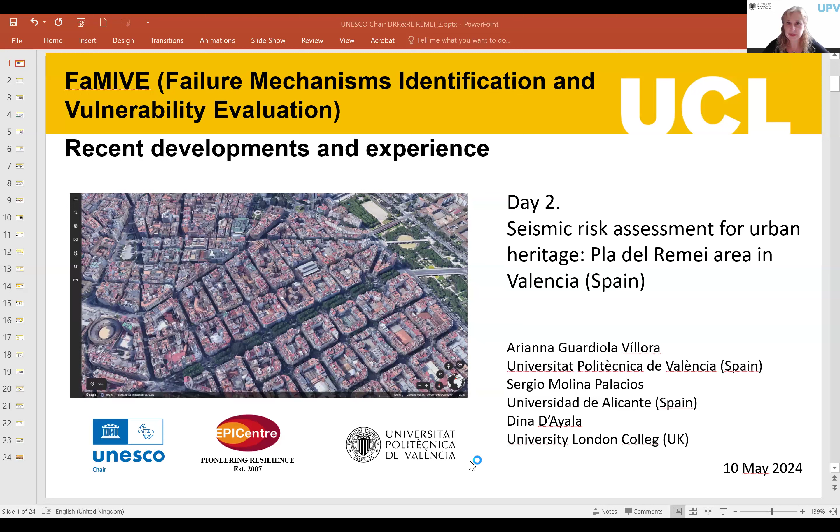Can you see my screen now? No, it doesn't seem to load. Maybe I can share it at this end. Now yes, now it's sharing. So please go ahead. Can you see my screen? Yes. No, it doesn't seem to work. And you are now muted, Ariana. You are muted. We can see your screen now, but you are muted. Now, can you hear me? Yes, and we can see the screen. So perfect. So I'm presenting.

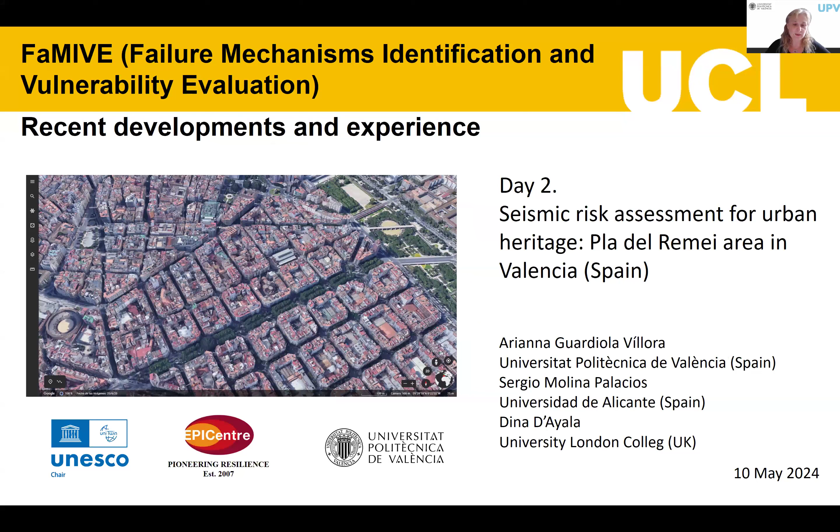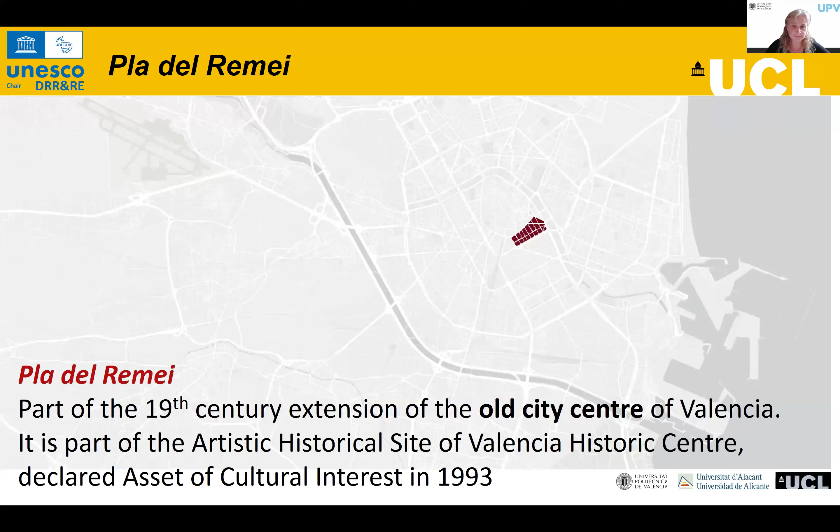My presentation is about the seismic assessment for the urban heritage, the case of the Pla del Remei in Valencia. Pla del Remei is part of the 19th century extension, this part in red, of the old city center of Valencia, which is this part in the map. It is part of the artistic historical site of Valencia Historic Center and was declared an asset of cultural interest in 1993. This area, where most of the Valencian modernism is located, was developed between 1884 and 1950 after the demolition of the medieval walls, and it's formed by 20 blocks.

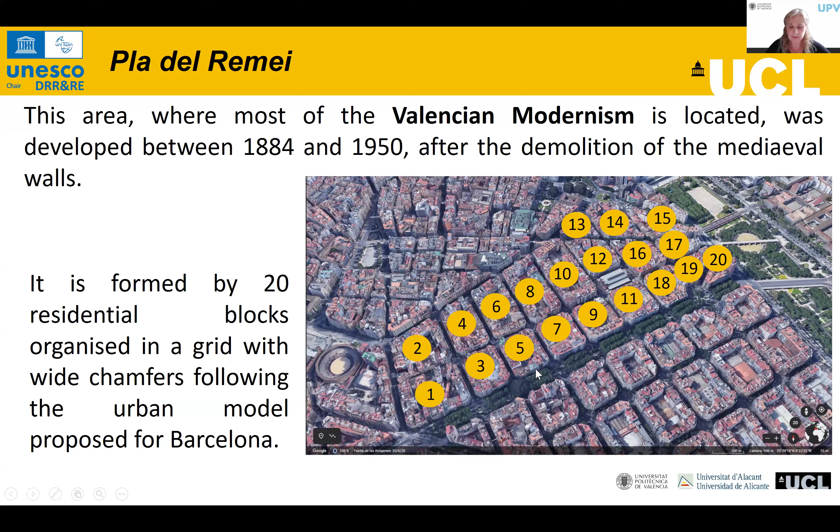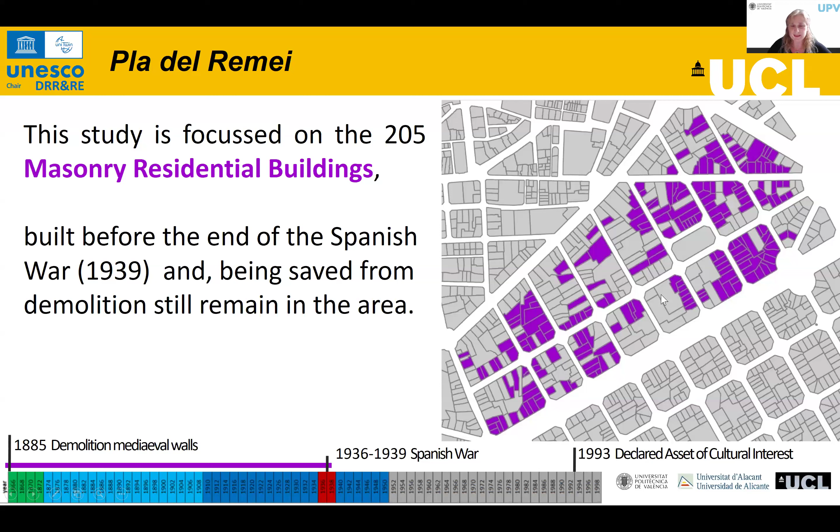Here in the timeline, we can see the date of the demolition of the walls, the date of the approval of the urban plan for this area, 1887, the Spanish War, and the date in which this area was declared an asset of cultural interest. This study is focused on the 205 masonry residential buildings, those in violet in the area, built before the end of the Spanish War in 1939, and, being saved from demolition, still remain in the area. We can see here in the timeline the period in violet that we are going to study, with the date of the demolition of the medieval walls. And this part in gray corresponds to the years in which these buildings in gray were demolished and substituted by new modern buildings.

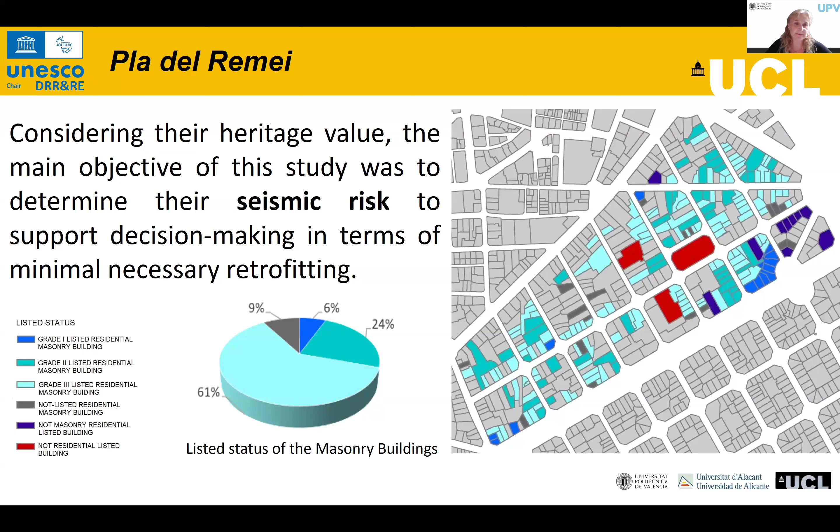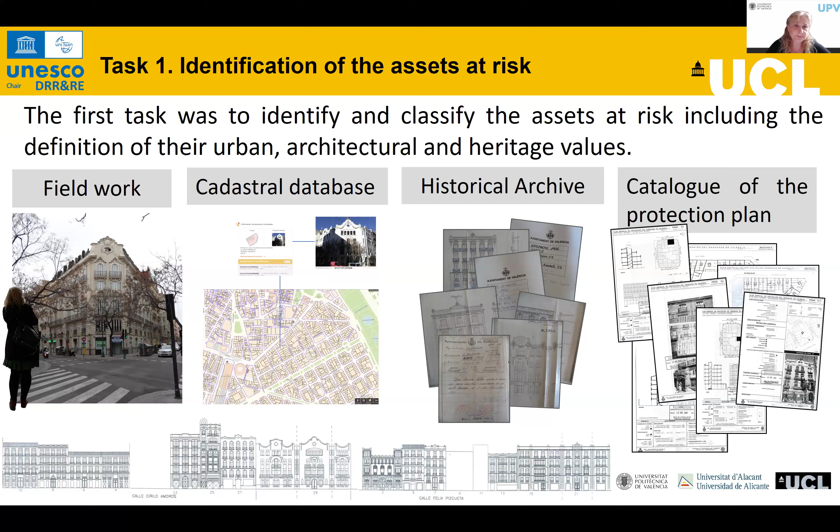According to the Special Protection Plan, only 9% of the buildings that we studied were not listed in any grade. Considering the heritage value, the main objective of this study was to determine the seismic risk to support decision-making in terms of minimal necessary retrofitting. For this purpose, the first task was to identify the assets at risk, including the definition of the urban, architectural, and heritage values. This task was done through fieldwork, consulting the cadastral database, visiting the historical archive to check the original drawings of the buildings, analyzing the catalog of the Special Protection Plan, and studying the original urban planning regulations of the area that at that time focused for the first time on

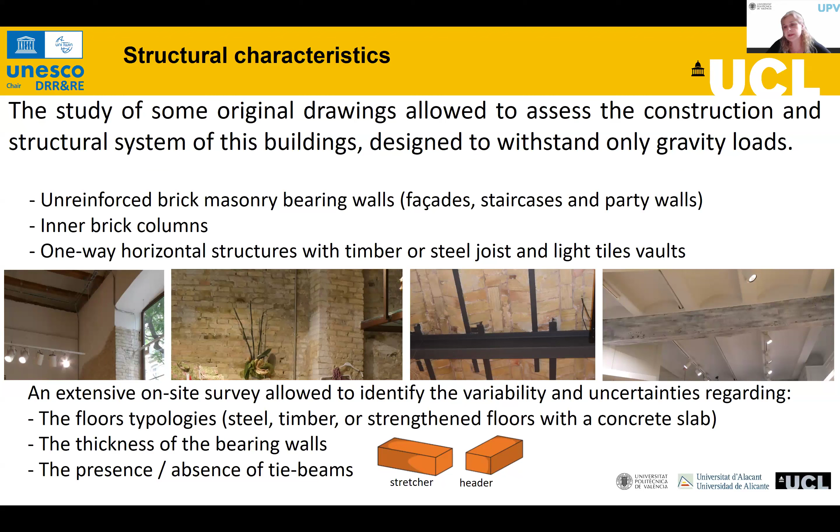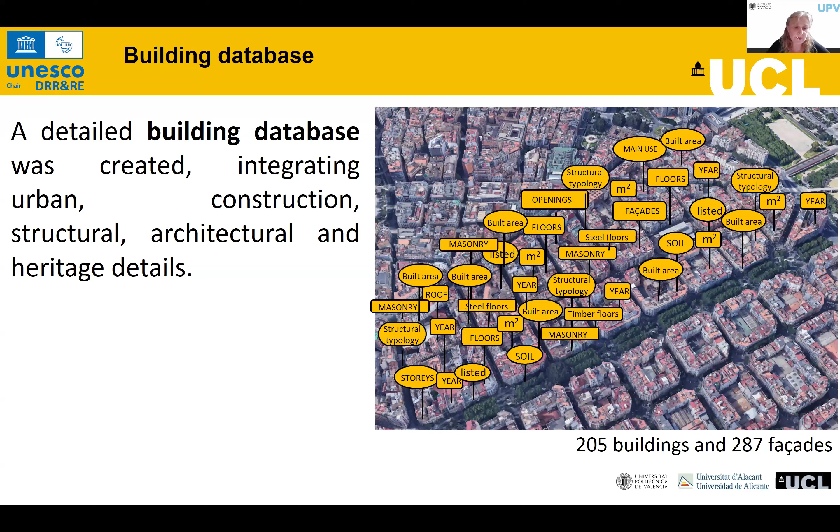With all the retrieved information, a detailed building database was created, integrating urban, construction, structural, architectural, and heritage details. And this new database was analyzed in detail to identify criteria for grouping the 287 facades in order to select a reduced representative sample of the building stock to be analyzed with FaMIVE.

It's important to point out that despite being possible to analyze with FaMIVE all the buildings in the database, considering the number of the buildings, the purpose of this approach was to show that representative samples can be identified for assessment of much larger building stock, and sensitivity analysis can be conducted for uncertain parameters.

On the other hand, as has been said, this sample can be considered quite homogeneous due to the limited flexibility of the planning regulations regarding the number of stories and the height between floors, and considering the reduced structural typologies available at that time.

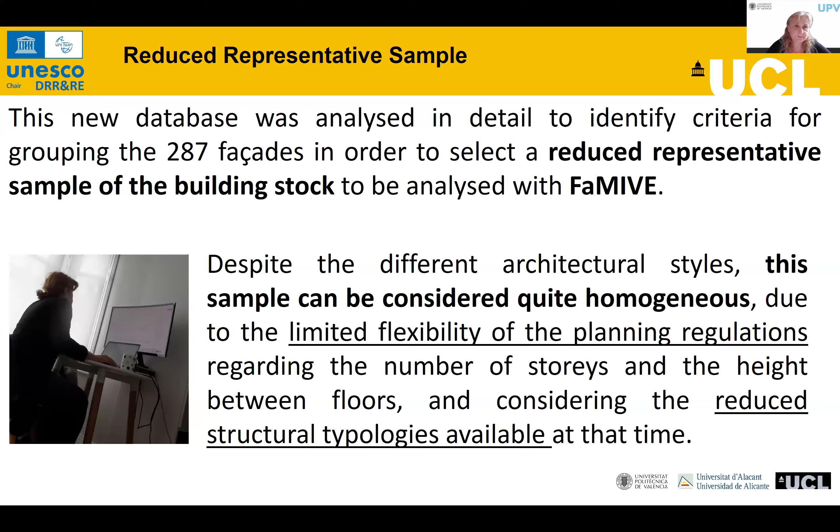The criteria for selecting the elements of the reduced sample were first, buildings with reliable information regarding the dimensions, thanks to the original drawings consulted in the historical archive or the information included in the catalog of the Special Protection Plan. Then, a proportional representation of number of floors and number of openings. Both parameters are related with the slenderness.

And finally, a proportional representation of the position of the facade in the block, considering three types. Inner facades connected with party walls with right angles, 90 degrees, as those, where's my mouse? Those here. We have C1 chamfer facades connected at one party wall with one right angle, like this one and that one. This is the right angle. And C2 chamfer facades connected with both angles greater than 90 degrees.

The position of the facade affects the restraint offered by the side walls to prevent the out-of-plane failure of the facade. So it was important to know the condition for each of the analyzed facades. Then this reduced sample was used as input data to FaMIVE to identify the different typologies representative of the buildings of Pla del Remei.

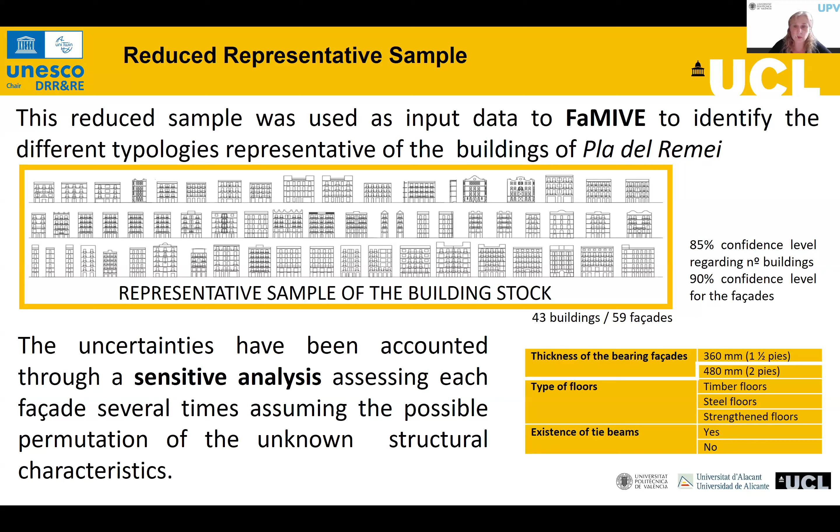We selected 43 buildings, 59 facades, and the uncertainties have been accounted for through a sensitivity analysis, assessing each facade several times, assuming the possible permutation of the unknown structural characteristics. That is, the thickness of the bearing facades, 360 mm or 480, the type of floors, timber floors, steel floors, or strengthened floors, and the existence or not of the tie beams.

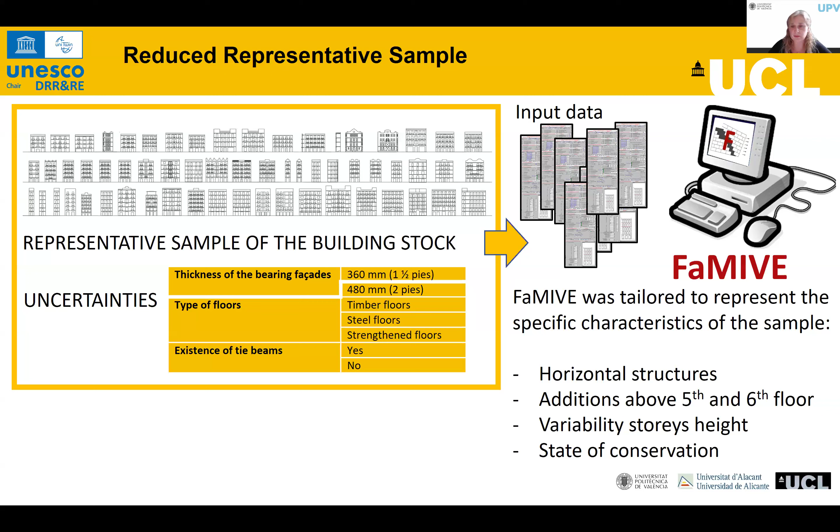At this point, FaMIVE was tailored to represent the specific characteristics of the sample, horizontal structures, the additions above 5th and 6th floor, the variability of the stories height, and the state of conservation. The results of this initial analysis, that were the collapse load factor and the failure mechanism, allow to obtain the capacity curves with the capacity assessment routine of FaMIVE, considering the collapsing part of the facade as a non-linear single degree of freedom oscillator, and these linear capacity curves were calculated for 4, 5 and 6 floors.

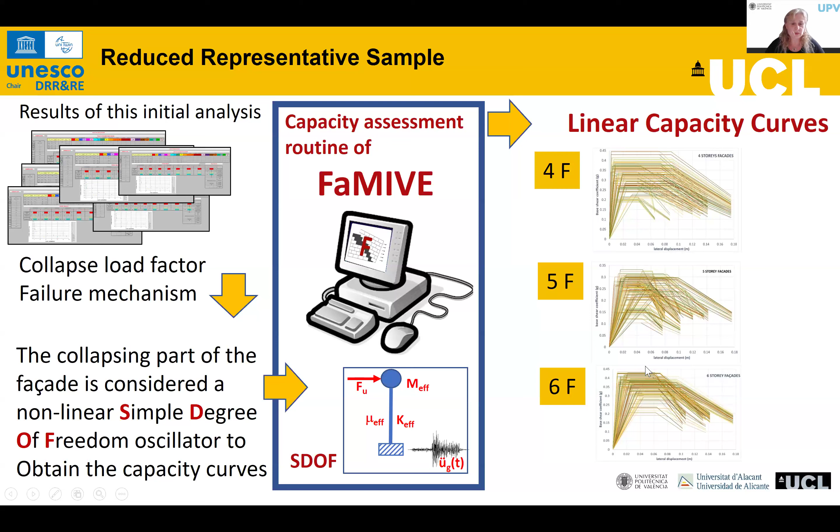Then homogeneous subsets of curves were created considering the different number of stories, 4, 5, or 6, the presence or not of tie beams, and the two nominal thicknesses that we were considering, 360 and 480. And for each subset, a multivariate analysis was conducted considering the position in the block, inner, C1 or C2, the number of openings, the length of the facade, slenderness of the facade, slenderness of the piers, and as a result of this analysis, finally 14 typologies were identified as representatives of the building stock.

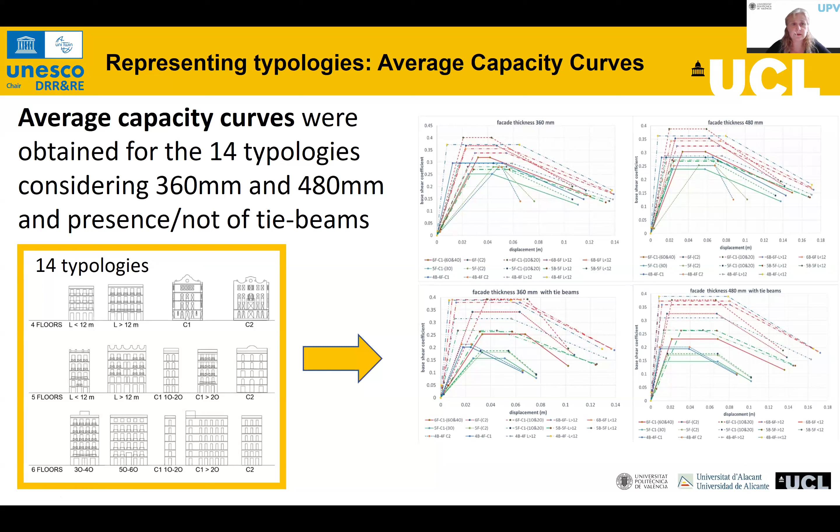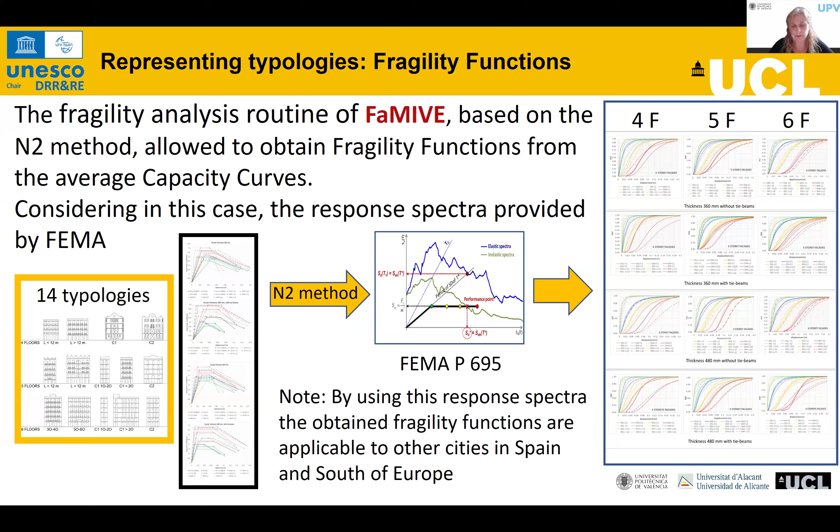Once the capacity curves and fragility functions were calculated, each of the buildings of the database was classified into one of these 14 typologies, assigning to it the corresponding capacity curve and fragility function.

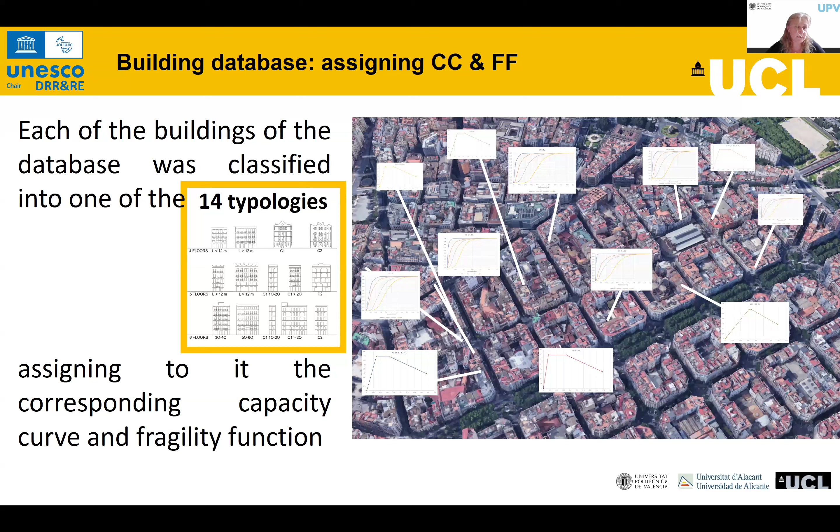In this study, SELENA software was used to compute damage and losses scenarios. The input data for each building were obtained from the database, including the UTM coordinates, the built area in square meters, the type of soil according to Eurocode 8, the obtained capacity curves considering four different situations, and the fragility functions. Additionally, 6 different seismic scenarios were considered, so we obtained 24 different sets of results.

Damage probability for the 5 damage states, and given the heritage value of these assets, and considering that it was difficult to quantify the expected probable losses in economic terms, losses were computed in terms of mean damage ratio and built damage area.

Okay, Selena is a different topic. Let's focus on FaMIVE, and the conclusions regarding FaMIVE are: after creating a detailed building inventory, integrating urban, architectural, geometrical, structural characteristics and heritage value, a detailed analysis of the database allowed us to identify criteria for selecting a reduced sample to conduct seismic capacity and fragility assessment.

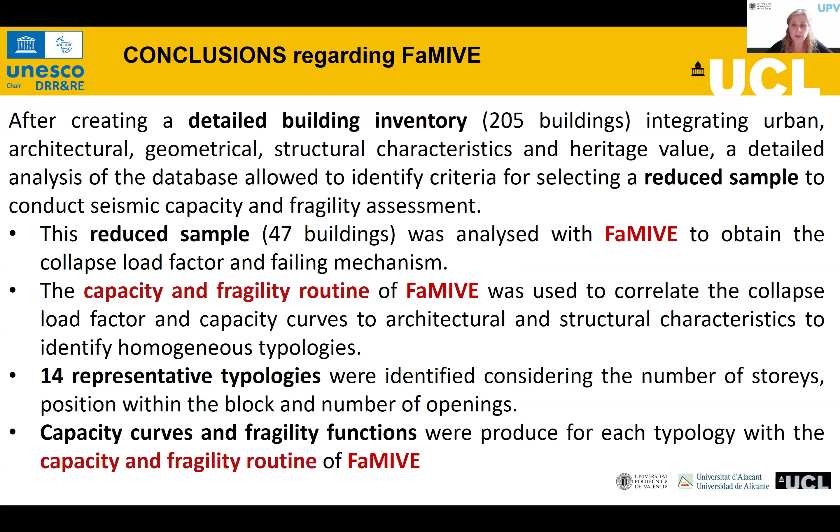14 representative typologies were identified, considering the number of stories, the position within the block, and the number of openings. And finally, capacity curves and fragility functions were produced for each typology with the capacity and fragility routine of FaMIVE.

Regarding the results, despite Valencia being located in an area of low to moderate seismicity, the results show that the maximum percentage of built damage area ranges from 5.8% to 11.6% for 475 years return period, increasing to 33.59% to 51.59% for 975 years return period, which is important considering the heritage value of the buildings of the area.

The high level of resolution of the study allows mapping and identifying the structures at higher risk, and is therefore a valuable tool to support sensitive and targeted retrofitting policies. You will find more information about this study in the paper Performance-Based Probabilistic Seismic Risk Assessment for Urban Heritage, an example in Pla del Remei area, Valencia, published in the Bulletin of Earthquake Engineering.

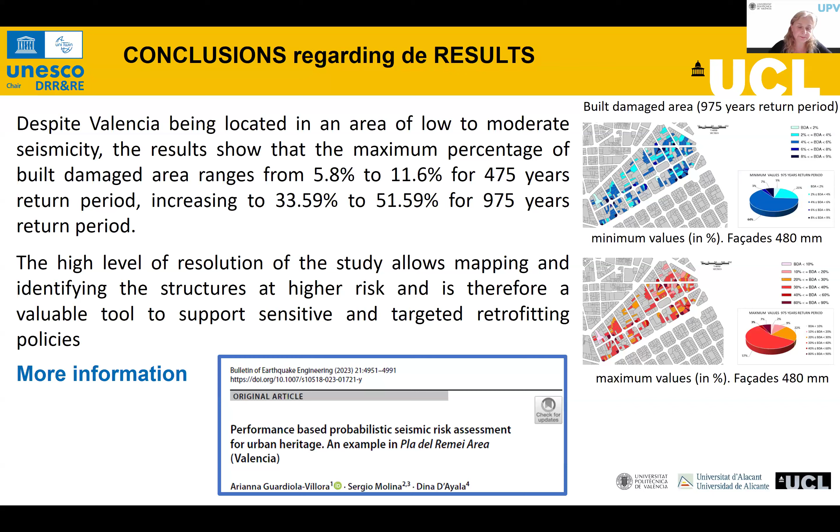And to finish, it is important to point out that at the end of the 19th century, the model of the expansion of most European cities was established by Haussmann in Paris during the Second Empire, which means demolishing medieval neighborhoods and building new healthy quarters.

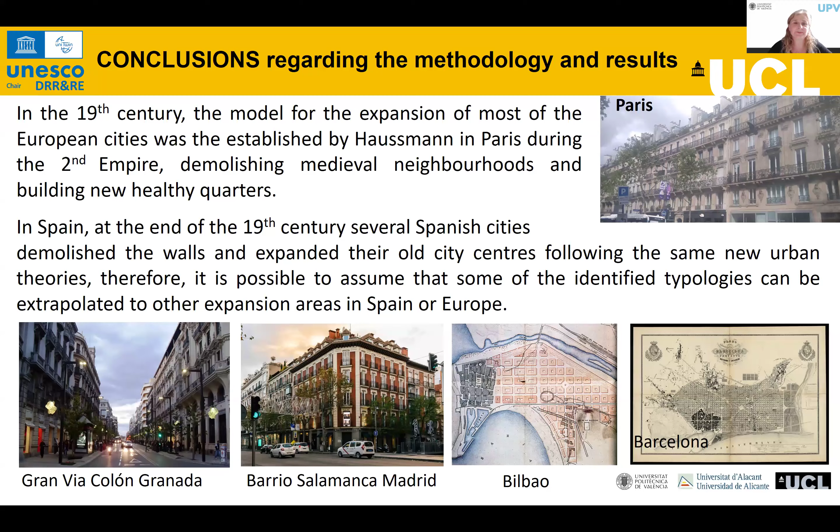In Spain, at the end of the 19th century, several Spanish cities demolished the walls and expanded their old city centers, following the same new urban theories regarding light and natural ventilation. Therefore, it's possible to assume that some of the identified typologies can be extrapolated to other expansion areas in Spain and Europe. Thank you very much for your attention.

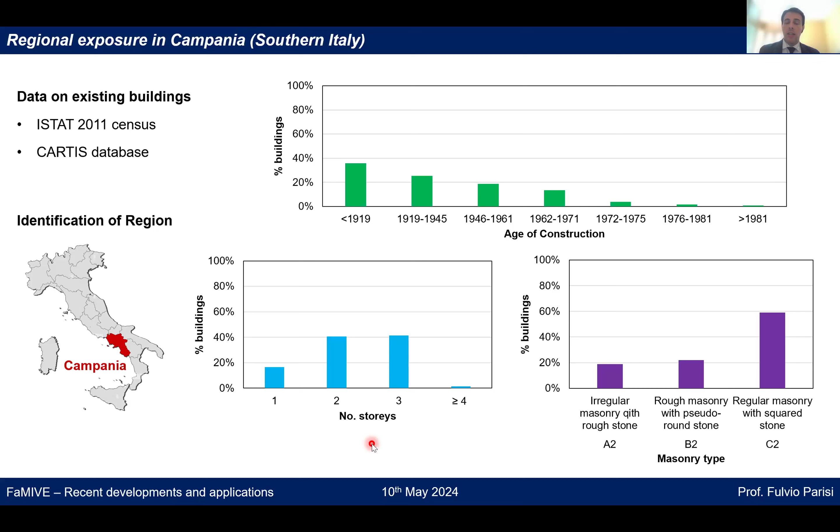And so the methodology that we delineated in cooperation with the group of Professor Dina D'Ayala at UCL is basically an incorporation of in-plane and out-of-plane failure modes of the wall systems that provide most of the earthquake resistance to this type of buildings.

And so, first of all, after collection of data, we processed them in a statistical way in order to then decouple the analysis in terms of nonlinear static analysis for global response of the buildings, but also nonlinear kinematic analysis for the identification and assessment with respect to out-of-plane failure mechanisms. Then we integrated this kind of analysis into a single assessment of capacity curves and fragility curves in order to derive some integrated IP-OOP fragility curves.

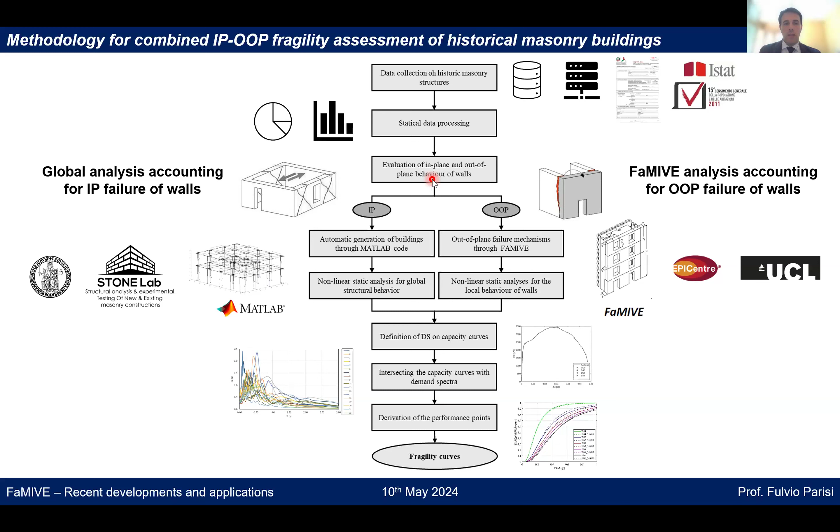So first of all, I would like to show you the basics and fundamentals of our analysis to account for global response of the building. We assessed it in terms of equivalent frame modeling. The approach is basically based on the graphical modeling in 3D of the wall systems. Then we go to the equivalent frame modeling of the wall, accounting also for the possible different types of floor systems. And then we further downscale the problem with respect to the type of modeling that we use for single structural elements.

And this is why I would like to stress that we use a fiber-based modeling approach for each element of the wall. This type of beam element is basically a Timoshenko beam element, so it is also characterized by shear and rocking behavior modes in addition to the main flexural one. And then we divide this Timoshenko beam element into 3 segments. 2 of them are rigid in order to incorporate the effects of pier-spandrel interaction zones. And the central part is basically a flexible element representative of either a pier or a spandrel of the wall.

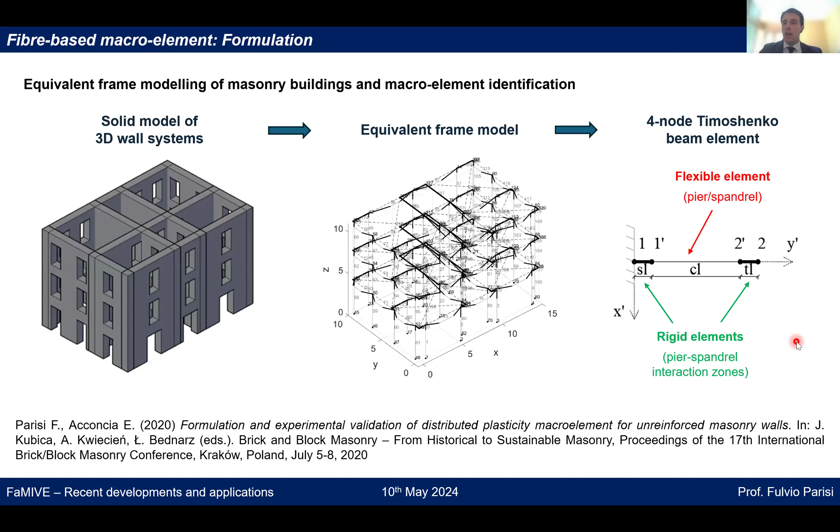Then we discretize each macro element in order to account, as you can see here, for the macroscopic behavior of masonry. So we go beyond some phenomenological modeling approaches that directly provide you some, let's say, shear versus drift relationships for the entire masonry walls, because we account for the mechanics of this kind of behavior.

And then we are able to integrate all these features in order to simulate situations like this one, where we first of all accounted for some pushover tests in order to validate our modeling approach. Then we compare our numerical curves in terms of shear versus drift behavior with respect to the experimental curves. As you can see here, we have a very low level of statistical model error over the whole range, I would say, of drift demands. So we are able to account for different types of failure modes in the plane of the masonry walls.

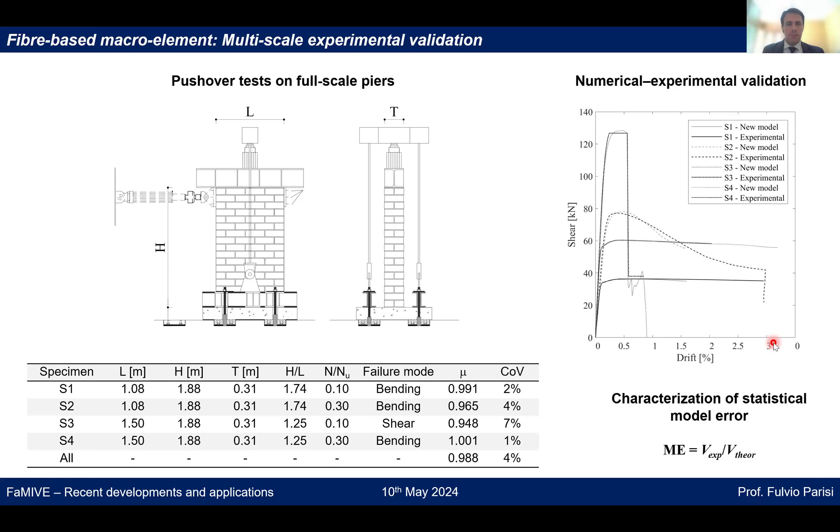And then on your right hand side, you can see the numerical-experimental comparison in terms of pushover curves. Again, you can see that we have a very good level of agreement between these curves, also because we are able here, for instance, to account for some shear-flexure interaction that in some cases strongly affects the final behavior of this kind of systems.

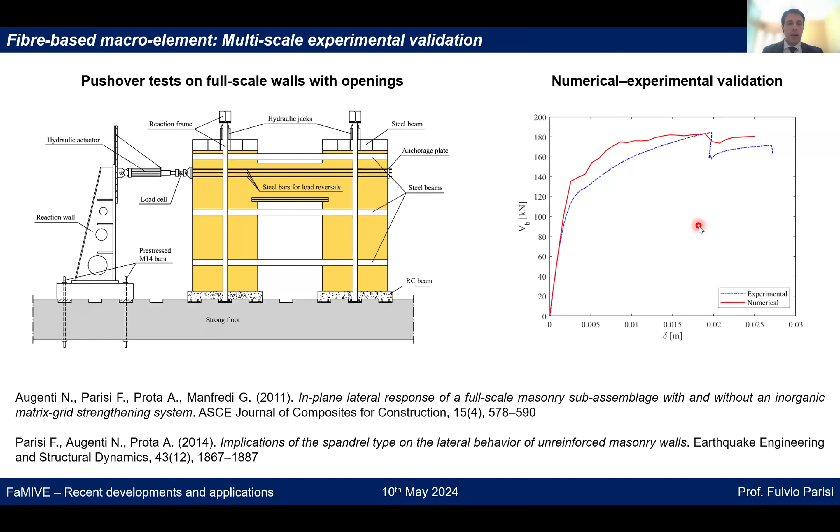So we went ahead with an application of this modeling approach to a region of interest, which was the Campania region. We also selected an age of construction.

Obviously, you can reproduce this kind of analysis over time and also for other regions of interest. And then we also selected a masonry type. So based on these three assumptions, we disaggregated the data set in terms of number of stories and type of floor systems. And then we also performed an uncertainty modeling of the mechanical properties in order to incorporate all of them directly within our analysis.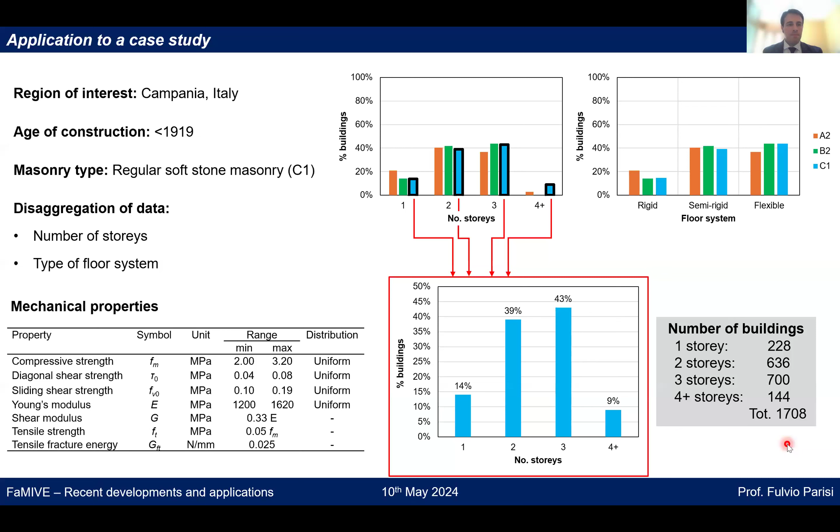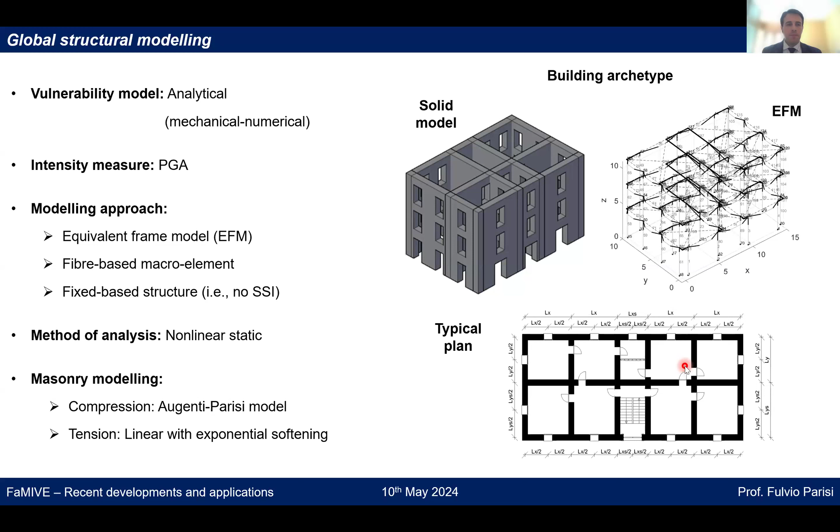And finally, we performed a global structural modeling of the buildings, aimed at developing a vulnerability model based on peak ground acceleration as an intensity measure. Then we integrated this approach into a nonlinear static framework for the global response analysis of the building. Here you can also see a typical plan of these buildings. And then we finally got the global capacity curves of the buildings.

For instance, here you can see the capacity curves related to the X direction of the building plan under modal force profile, but you could also see similar outputs related to other directions of the building and other force profiles. So we characterized the dispersion associated with the number of stories over the whole range of drift capacities. And then we identified for each pushover curve the occurrence of 4 damage states, DS1 to DS4, going from operational level to collapse prevention level.

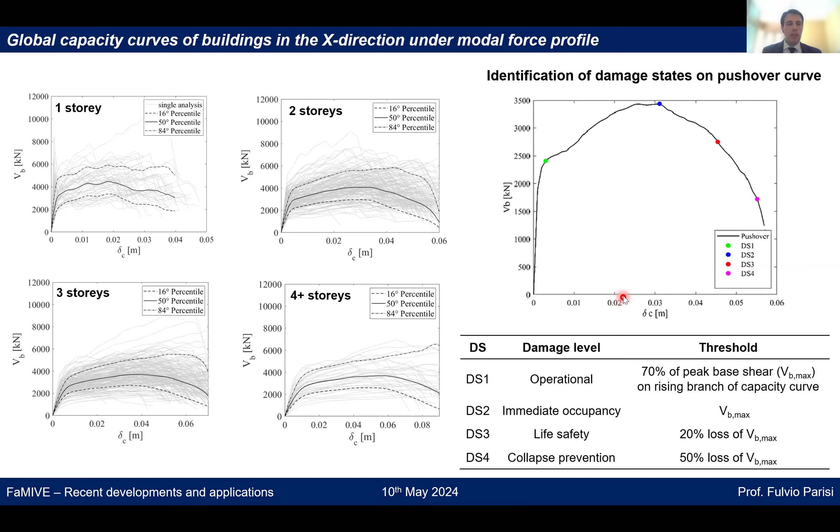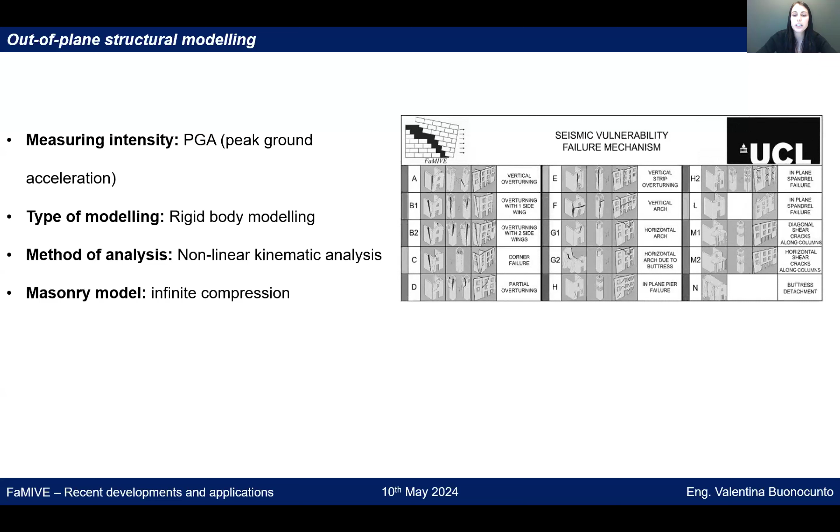I briefly recall the underlying hypotheses. The modeling typology is rigid body modeling. The analysis method is nonlinear kinematic analysis, and the masonry is modeled with infinite compression. Having all the mechanical and geometric parameters from the database, the collapse mechanisms were calculated for the wall under examination. Subsequently, the capacity curves were obtained through nonlinear static analysis.

Here are shown these capacity curves for different numbers of stories, 1, 2, 3, and 4+. And damage states were also defined on these curves, which are critical for understanding the magnitude of structural impact during seismic events. Specifically, we have 4 damage states, DS1 to DS4. DS1 occurs at the change in stiffness of the capacity curves.

DS2 at the first point, displacement with maximum base shear. DS3 on the plateau, in the middle about, and DS4 on the decreasing branch of the curves.

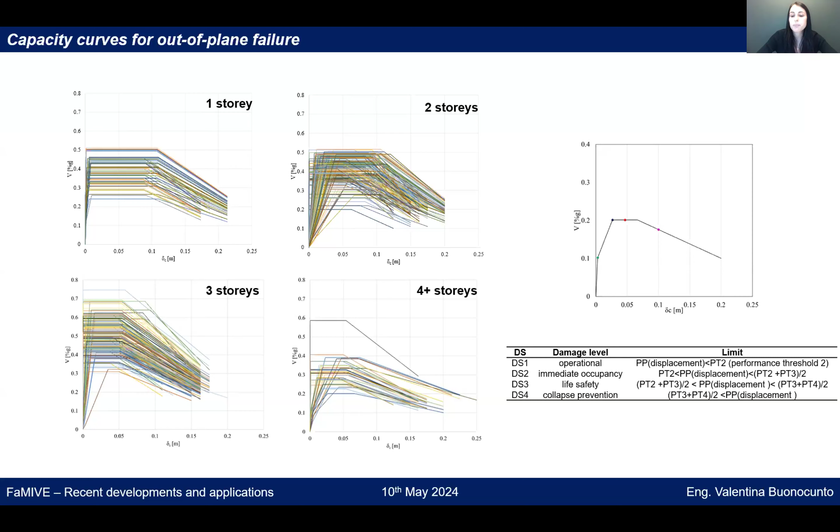Applying the N2 method, we obtain the out-of-plane fragility curves for the different number of stories. As you can see, the median value in particular shows a minor increase between DS1 and DS2, followed by an increase from DS2 to DS3 and DS4.

The transition from DS2 to DS3 is particularly evident, which could reflect the sudden onset of a unique failure mechanism associated with the out-of-plane action.

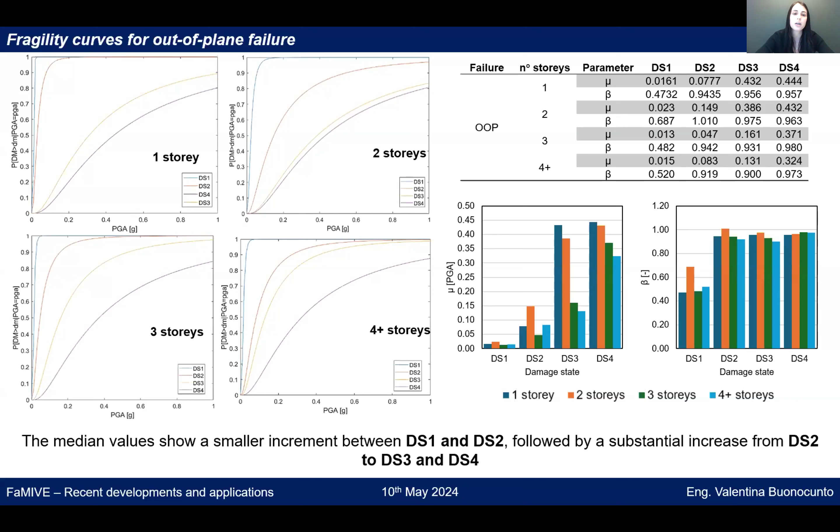Following that, we combined the fragility curves for in-plane and out-of-plane failure using maximum likelihood estimation. The results are expressed in terms of median value and dispersions, providing a more complete risk assessment.

And here are the medians for the 3 cases, for 3 failure modes: in-plane, out-of-plane, and the combination of the 2. We observe that the biggest medians for DS1 and DS2 are for in-plane failure, while for DS3 and DS4 we have a bigger median for out-of-plane failure.

Considering the combined curves, the median is attenuated for all DS and for the number of stories, being in the middle between the in-plane and out-of-plane failure.

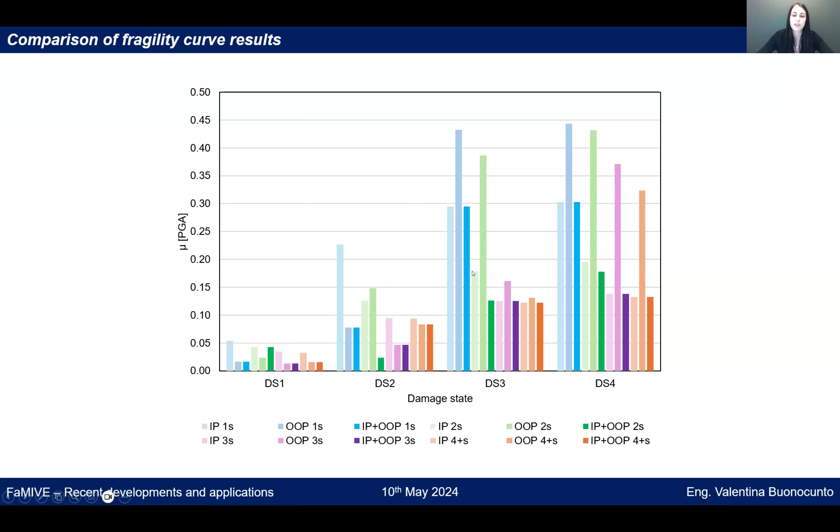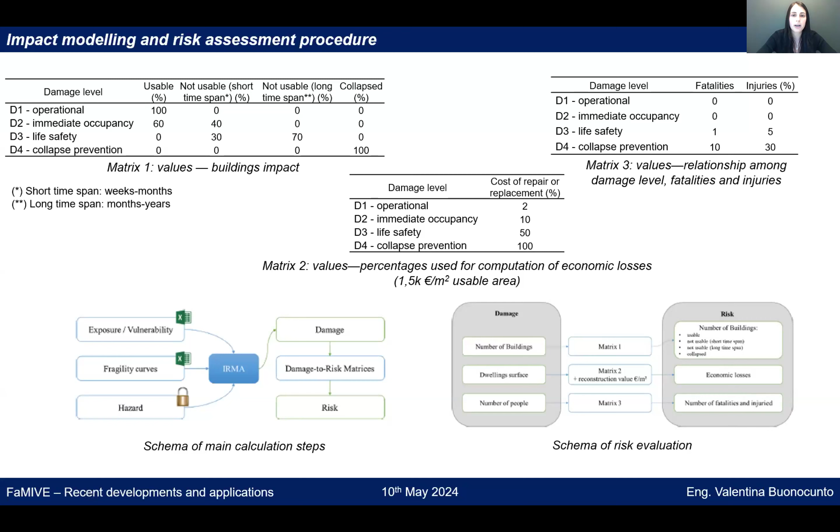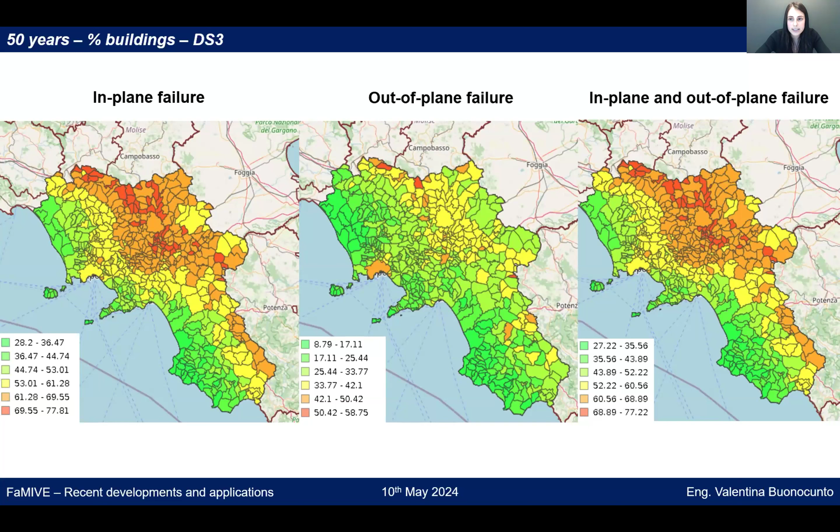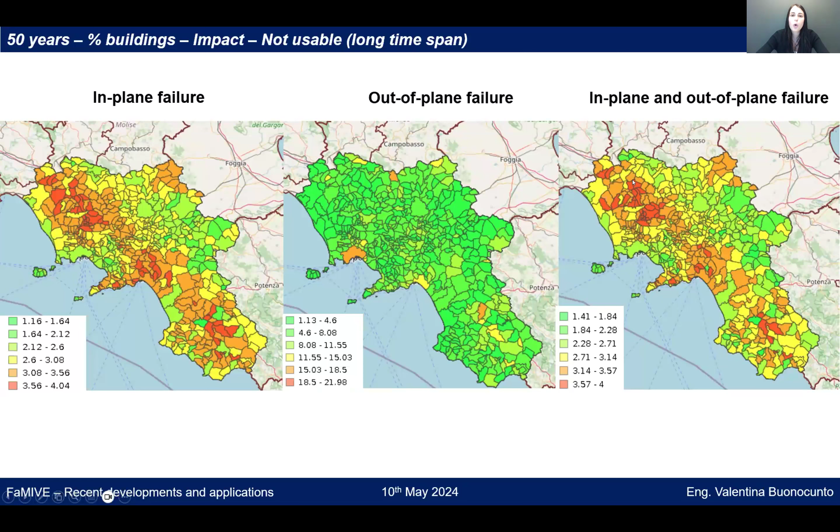Here I studied the impact in terms of the percentage of buildings not usable for a long time. It can be seen that the percentage of not usable buildings is higher for buildings that have in-plane failure, and for combined in-plane and out-of-plane failure.

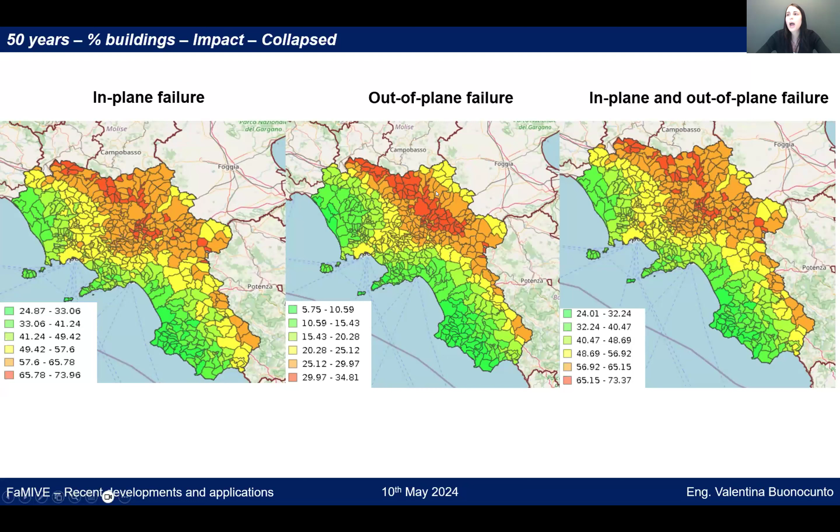And here the maps for the collapsed buildings. For all 3 failure modes, we have a damage concentration of collapsed buildings in the center and in the right of Campania region.

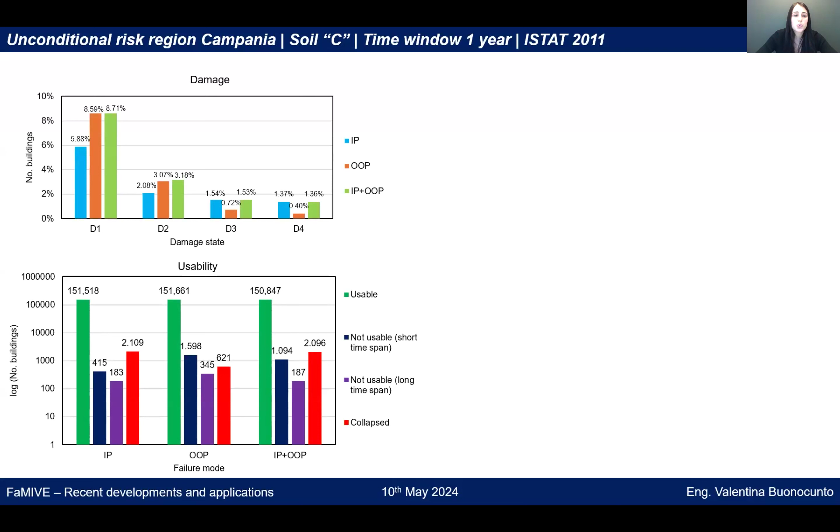For an unconditional risk over a 1-year time window, we have calculated damage, usability, human losses, and economic losses for 3 failure modes: in-plane, out-of-plane, and in-plane plus out-of-plane. As you can see, economic losses are higher if failures are combined. This probably comes from the high number of buildings not usable for a long time period that have an out-of-plane failure mode.

Anyway, for human losses in the in-plane case, fatalities and injuries are more than in out-of-plane failure. While for the case combining in-plane and out-of-plane failure, it is similar to the case of in-plane failure.

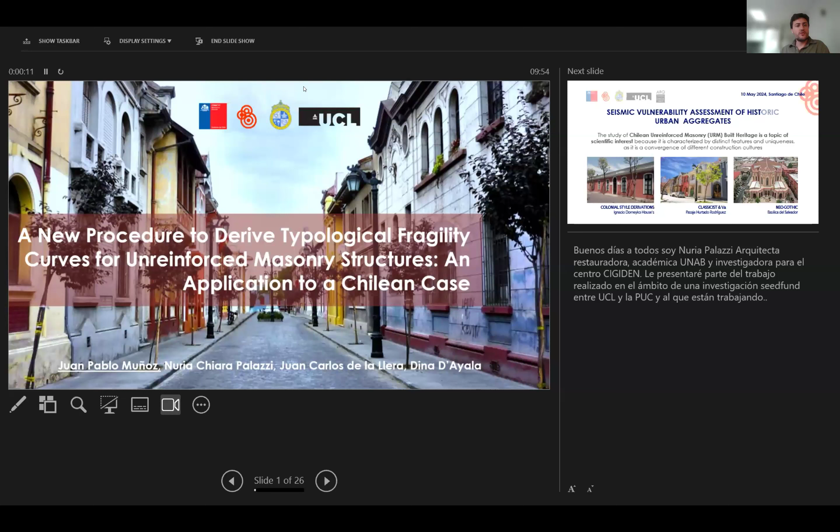Thank you, Rafael. I'm going to share my screen. Can you see my screen? Yes. Perfect. Okay. Thank you. Good afternoon, everybody. My name is Juan Pablo Muñoz, I work at CIGIDEN. The presentation is in presenter mode. Okay. Let me see how to change it. There it is, I think. Perfect. Thanks.

My name is Juan Pablo Muñoz. I'm going to present our work, a new procedure to derive typological fragility curves for unreinforced masonry structures and application to a Chilean case. I'm presenting in the name of our team. Here present is also Nuria Chiara Palazzi, who is actually leading this investigation. Also part of the team are Juan Carlos de la Llera and Professor Dina D'Ayala. So I'm going to start with a bit of context to see why it's important to study this in the case of Chile.

So we can see that Chilean unreinforced masonry buildings are quite important in terms of heritage structures. It's a topic of scientific interest because we can see very unique features in terms of architecture and construction techniques, because it's a convergence of different construction cultures. Here we can see some examples of that. So there's an important variety of buildings of this type in Chile. Here we see, for example, colonial style buildings with this continuous facade and single-story building. It's quite different from this one in the middle, this two-story building, where you can clearly see the difference between different structures, and this neo-Gothic basilica in the center of Santiago as well.

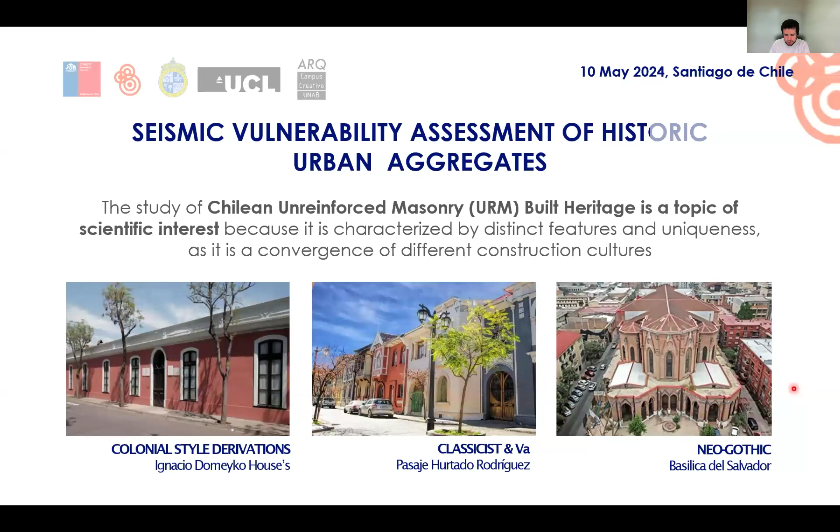So from our heritage, architectural point of view, it's quite interesting to study this because of its value. Now, if we see how these heritage buildings are distributed in the country, we can see that most of them are located in the central regions of Chile, which is where most of the population is concentrated actually. And most of them are in the metropolitan region, which is where the capital, Santiago, is located. So that's where we are going to focus our study.

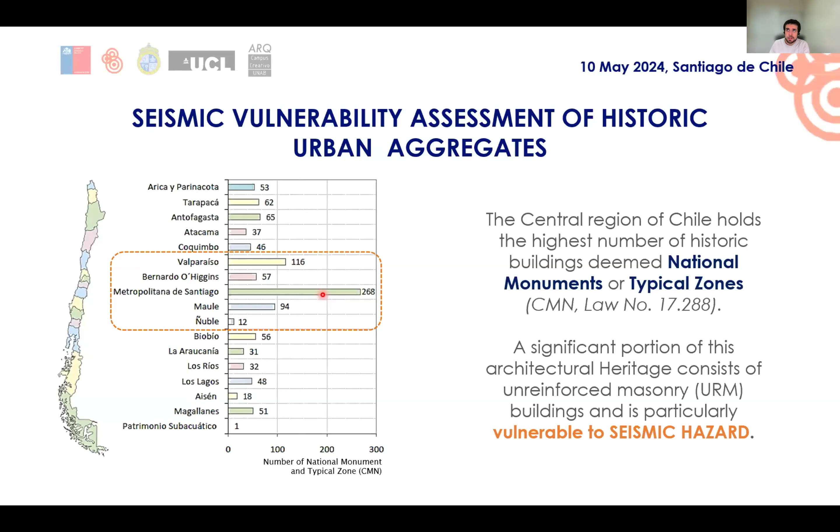And obviously, most of these buildings are unreinforced masonry structures, which are very vulnerable to seismic hazard. And we have seen that in different earthquakes in the past. Here are just two examples. We saw that in the 1985 earthquake and also in the 2010 earthquake, where important damage was observed to many buildings, but in particular to unreinforced masonry buildings. These were strong megathrust earthquakes, magnitude 8 and 8.8, that caused severe damage. The 2010 earthquake affected the country in many ways. 500,000 homes were severely damaged. We saw important economic losses and an important number of deaths.

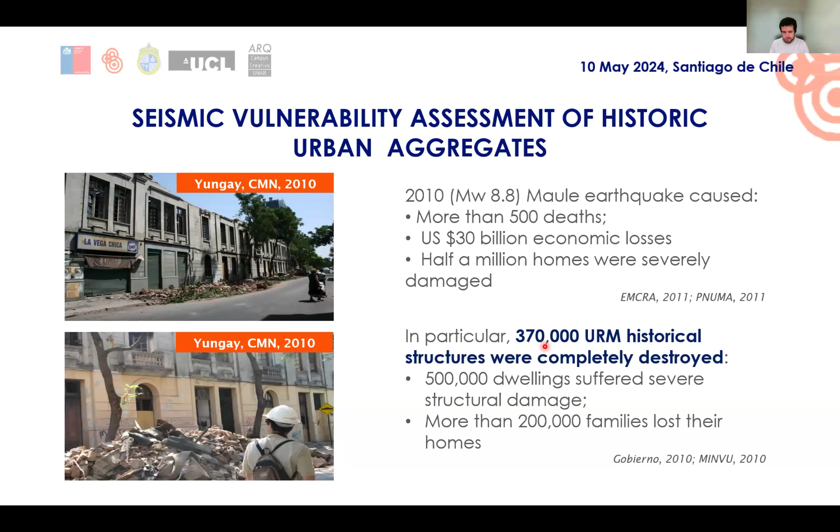But in particular, if you go and see what happened to the unreinforced masonry structures, we saw that 370,000 of them were completely destroyed, which meant that 500,000 dwellings suffered severe structural damage, leaving more than 200,000 families without a home. So that obviously is something important to take into account to justify, so to speak, why we're studying this.

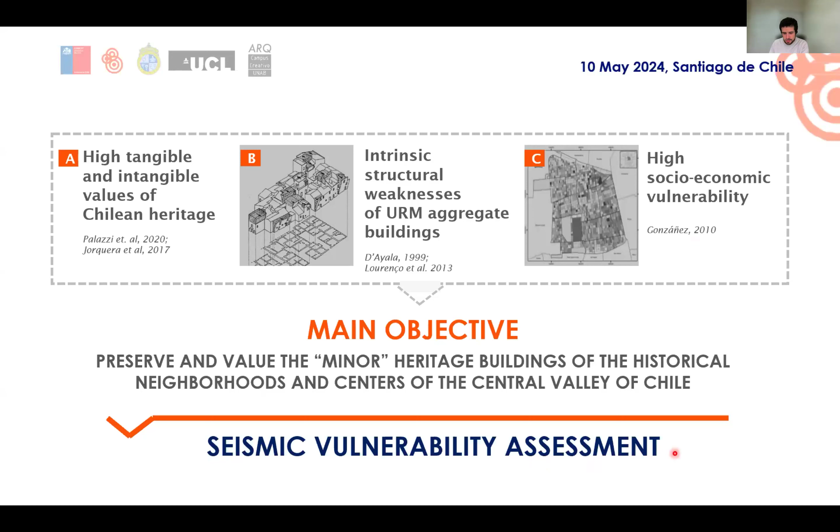So taking all these points, it's important to study this in the case of Chile because we have high tangible and intangible values from a heritage point of view, but also because it affects the people severely whenever there's seismic damage to these kind of structures, because these structures are particularly vulnerable to seismic hazard, and also because, as we can see in some other studies, they're associated with high socioeconomic vulnerability. And that being said, the main objective of the project that we are running is to preserve and value the minor heritage buildings of the historical neighborhoods and centers of the Central Valley of Chile. And for that, we need a seismic vulnerability assessment to be able to quantify the possible impact of earthquakes.

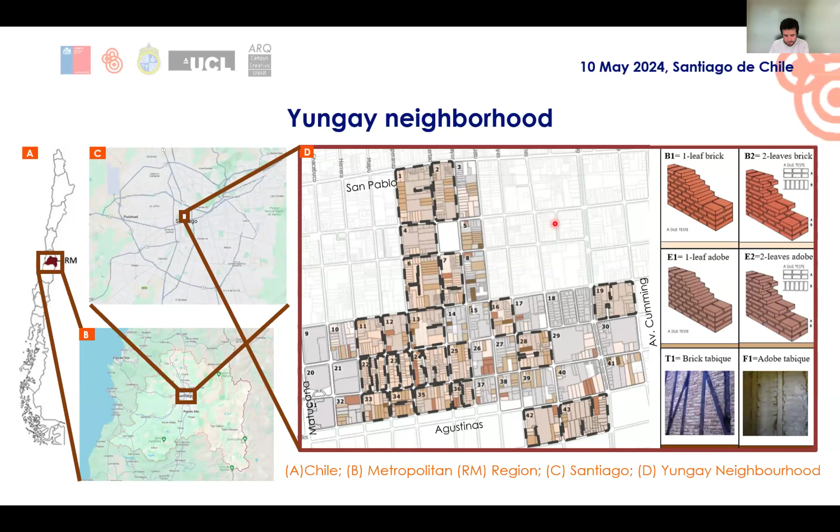Now, as I mentioned, most of the historical buildings in Chile are located in the central zone, so we are going to focus the study there. So here we have the country. If we focus on the metropolitan region, then on Santiago, and then on the center of Santiago, we get to this zone. This is a typical zone. It's called the Yungay neighborhood, which is composed of unreinforced masonry aggregate structures. It has over 40 blocks composed of different materials. We have brick, we have adobe, and we have tabique, which is this combination of masonry and wooden elements. And this is the zone that we're studying and applying the FaMIVE methodology to obtain fragility functions.

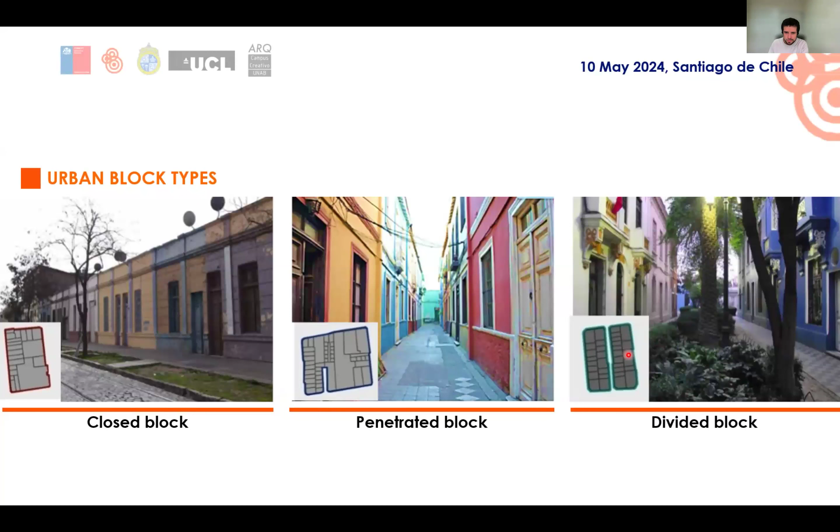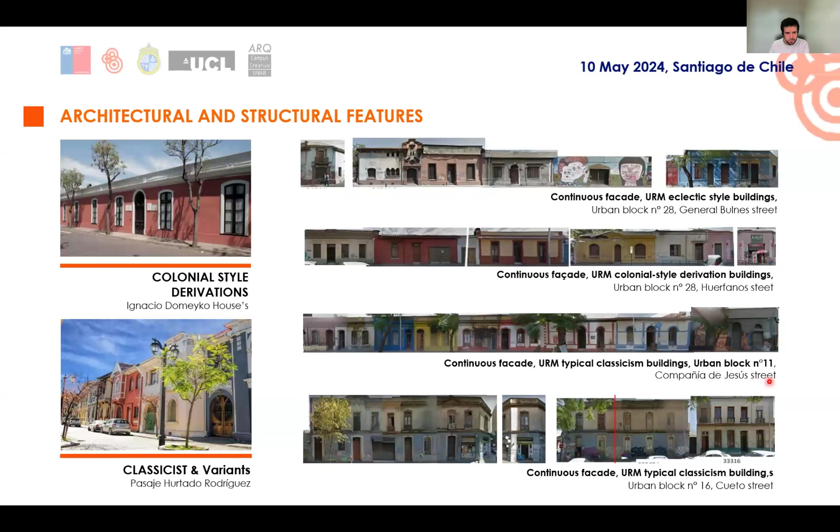So first, we have the colonial style derivations. This represents around 60% of the facades that we are studying. They are typically single-story buildings like this one. Sometimes there are two-story buildings, but it's not very common. They sometimes have this kind of addition on top of the facade called the antetecho. They have a wooden structure, wooden trusses for the roof. And one interesting element that is common in the Yungay neighborhood is the ochavo, which is this diagonal wall in the corner.

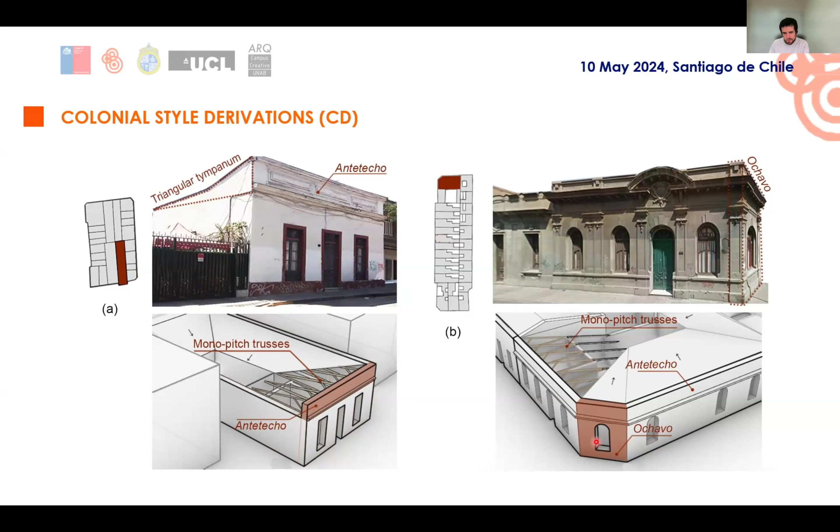Now, the classicist and variant buildings represent approximately 40% of the different facades in the Yungay neighborhood. They tend to be two-story buildings, sometimes 3 or 4 stories, but it's not very common. Most of them are 2 stories. And when it comes to materials, we have a variety of them. Some of them are brick, some of them are adobe. Sometimes you find tabique in the upper stories. So there are differences, obviously, and that translates into differences in the capacity curves.

This is just one broad, so to speak, architectural style. You can see more specific detail in the architectural styles, like neoclassic, neo-baroque, and other kinds of styles there. So that's what we're studying here, the Yungay neighborhood, and we are applying the FaMIVE methodology to obtain fragility functions that we can use for seismic risk assessment. I'm not going into detail here because this was presented yesterday, but what we're focusing on now is part of this analysis, mostly the data collection.

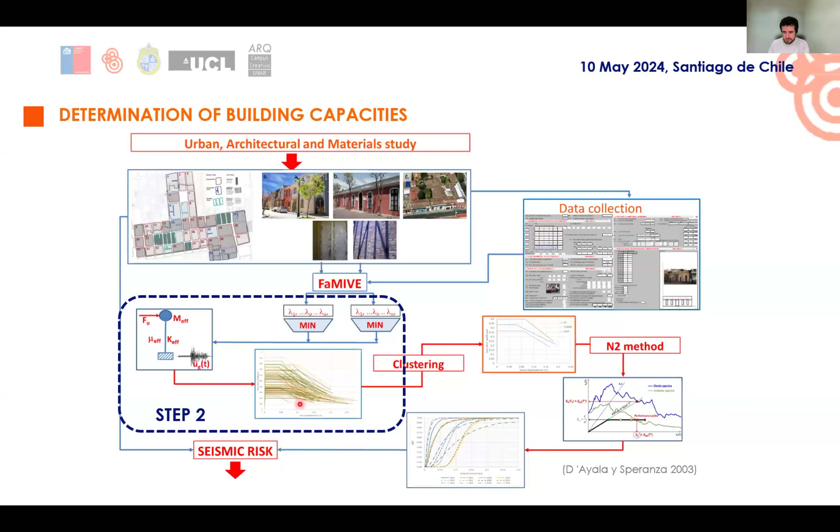Obviously, we visited the facades. The sample was composed of 423 facades. We collected the data in the FaMIVE form. Obviously, this is updated, and we have to try the new shell to see how it works. And with that, we could run the analysis to obtain the capacity curves of all the facades and the controlling mechanism, which is an input for the next step where we can obtain the fragility functions that we can then use for the seismic risk assessment.

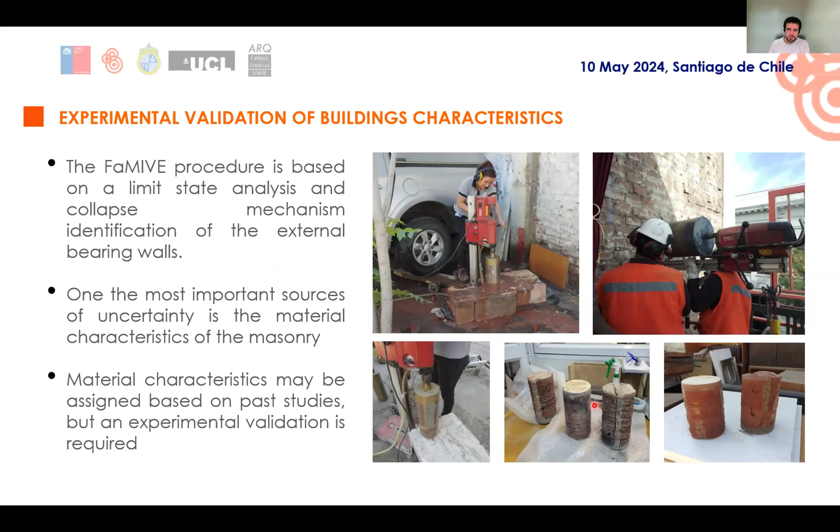But not only did we go to collect the data for the FaMIVE program, we also collected some data to further characterize the facades in mechanical terms. So we ran some in situ testing. We got some samples from the walls, and that allowed us to run different tests.

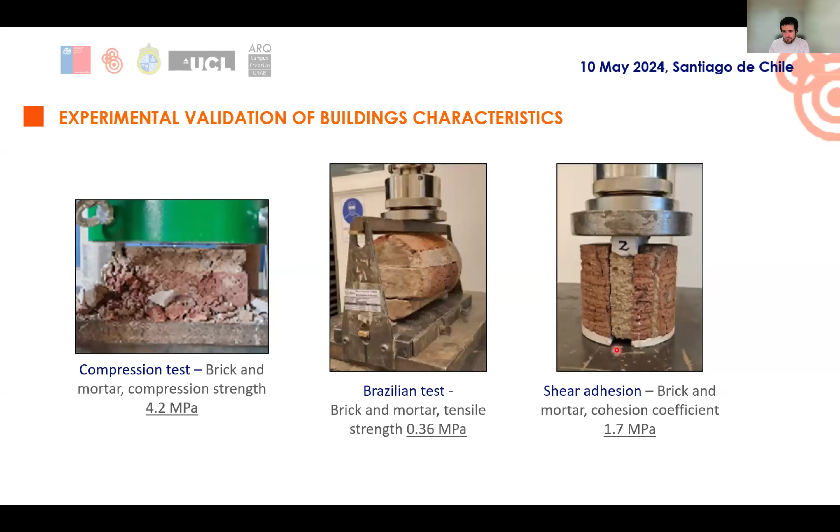So we could characterize the facades in terms of the compression and tensile strength, but also in terms of the cohesion coefficient between the mortar and the brick. That was used obviously as an input to characterize the quality of the masonry, but we're also using that for other studies for the facades.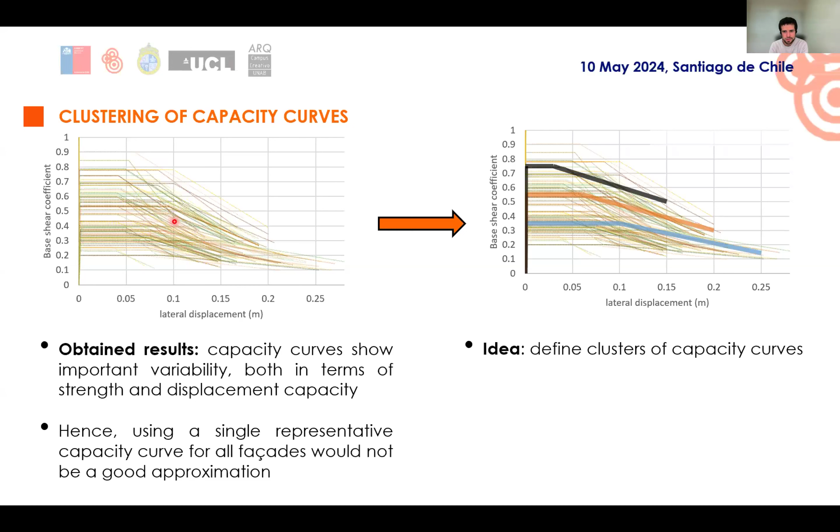So what we decided to do was, as others have done, to try to define typologies of facades. Basically, we want to classify these capacity curves in smaller sets that are more consistent. So the first way of doing that was to classify them based on the failure mechanism or the family of failure mechanism that was observed. Here we see the median, the mean capacity curves for the different mechanisms that were presented before. And we see that there's an important change, particularly in the case of the shear coefficient.

But we can also classify them in terms of the family of mechanisms. So we can have the out-of-plane, in-plane, and combined representative capacity curve. Now, while this works in the paper, it's probably not very useful, because it's not easy to extrapolate these results to a different facade. If we go to a new facade that we haven't seen, we don't know beforehand if it's going to fail with an out-of-plane, in-plane or combined mechanism. So it's not easy to use for a new setting.

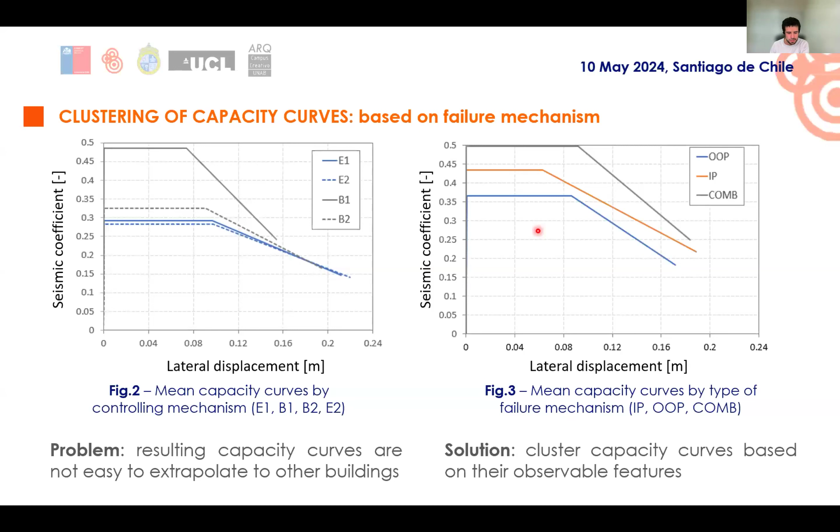So what we wanted to obtain was extrapolable results. So we decided to clusterize the curves based on their observable features. So we developed an algorithm to do that, and the goal is to build a logic tree that classifies the capacity curves based on these properties that we see here, based on the architectural type. And we have two different types, as I mentioned before. The floor type, if the elements are parallel or orthogonal to the wall, or if there are slabs. The quality of the connection between orthogonal walls, if they are good or bad in both ends of the facade or just in one of them.

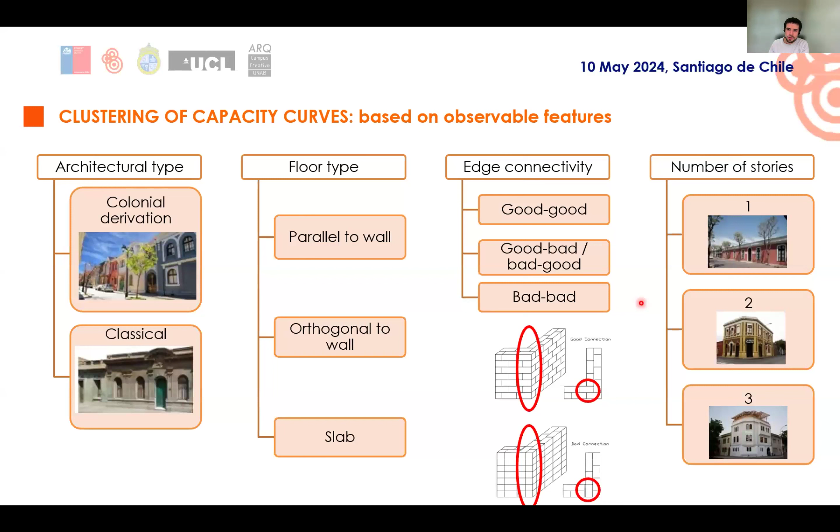The number of stories. The roof type, because we see some structures have tiles, some have metal elements. If we have masonry or wooden parapets or just slab, the kind of additions that we have, because sometimes we have architecture, sometimes we don't, and the material of that architecture changes, and also based on the material, if we have adobe or brick, how is the dimension of those elements, or if we have tabique. So we developed this algorithm that classifies the facades automatically based on these properties to get typologies, to get these clusters that are easier to identify.

Here I'm going to zoom in a bit, but basically here we have the initial set of facades, and this first divides the group in two based on the architectural style. So this upper portion corresponds to the colonial derivation, and this lower portion corresponds to the classic and the variant style. And then it further divides this group based on different architectural features. And the goal of this is to try to minimize the variance that we see inside the cloud of capacity curves. So each new cluster, each new node of this logic tree has less dispersion than the one before. So if we see here, I'm going to zoom in.

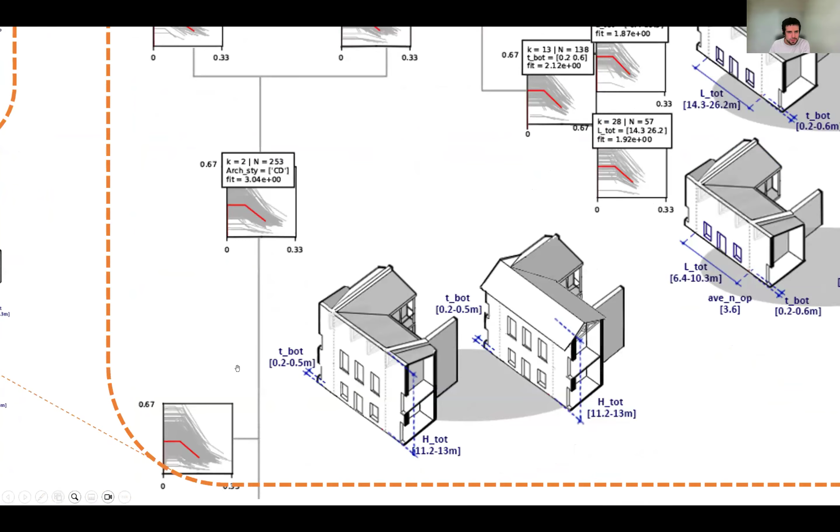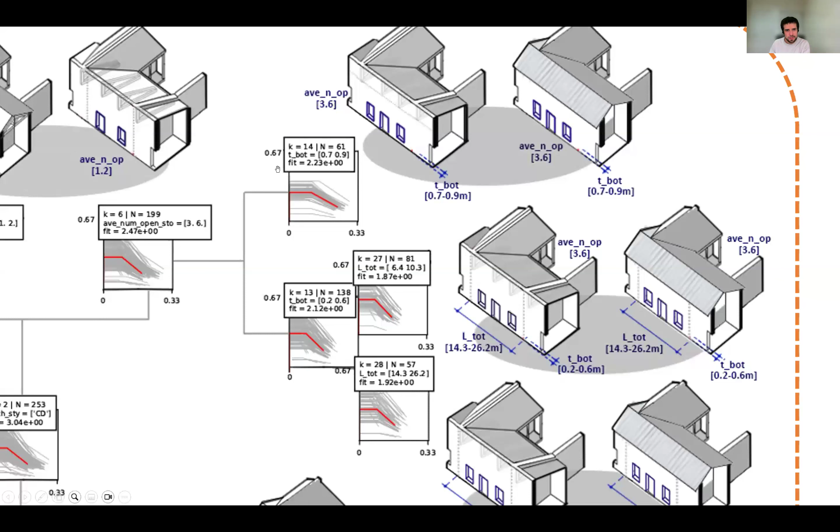For example, here we divide the initial cloud in various architectural styles, as I mentioned. This one here is divided then based on the number of openings. So one branch has 1 to 2 openings, and the other one has 3 to 6. This is further divided based on the thickness of the wall, the thickness at the bottom. So we have one side with elements between 70 and 90 centimeters. The other one is between 20 and 60.

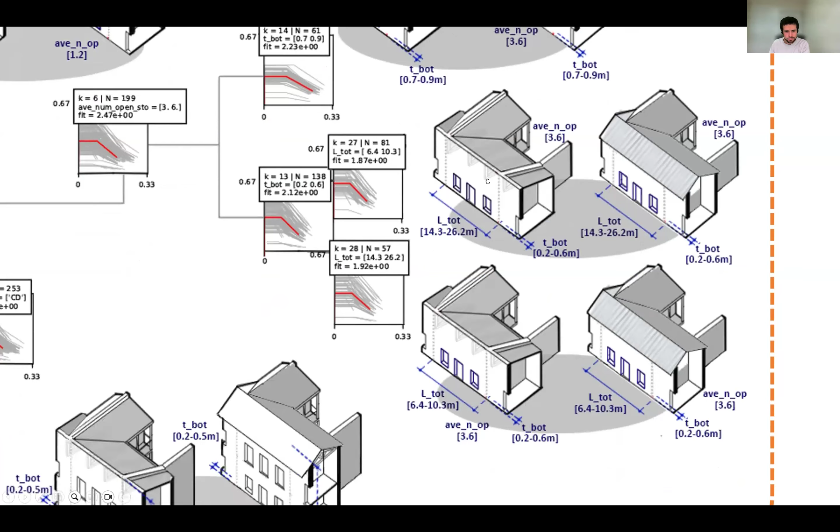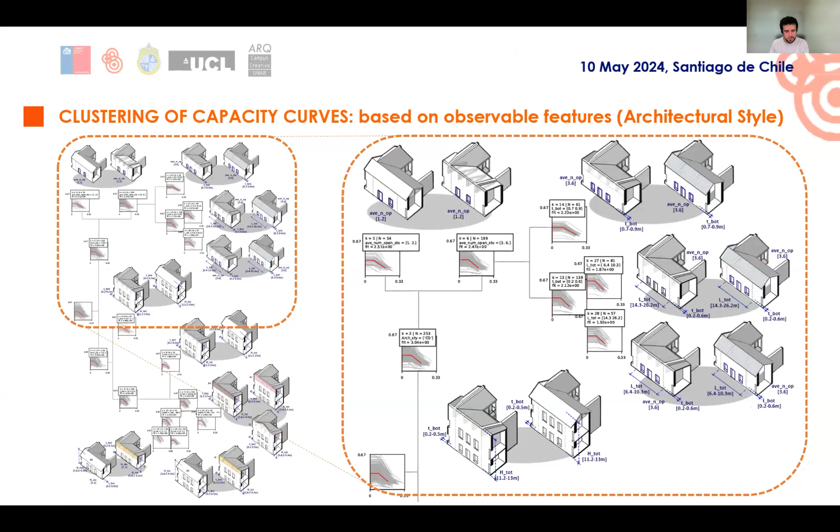And then this one is divided based on the length of the wall. And the same is done here for the other side of the facade, and not necessarily the divisions are the same. For example, here there's a division based on the additions on top of the facade, or based on the number of stories. That depends, because the algorithm is adaptive. Each time you have to make a division, it selects the best possible way to do it, to minimize the dispersion. But we can also try and tell this program how to classify the facades based on expert criteria.

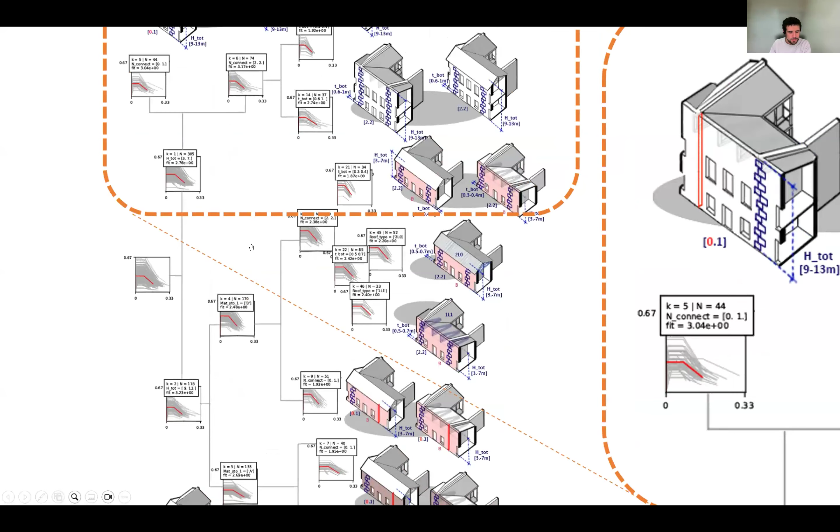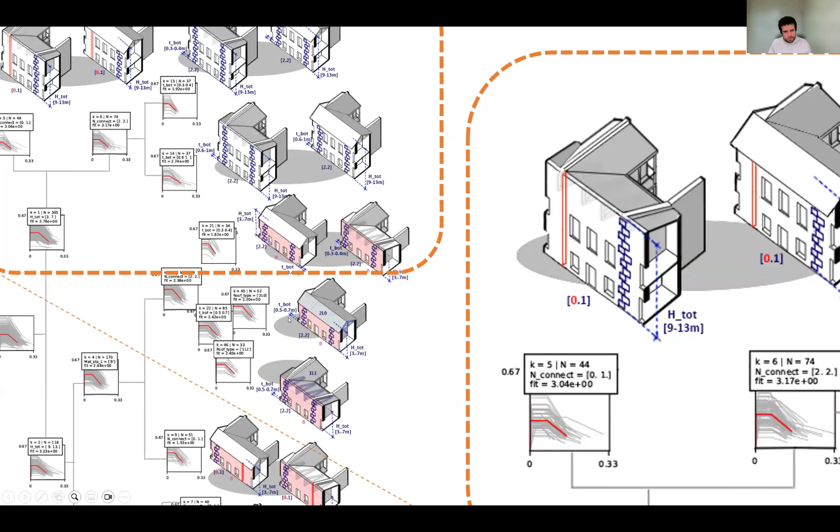So here, for example, this is based on engineering parameters. So the facades are divided based on the total height of the facade, the number of good connections, the thickness at the bottom, and the roof type. So it's a very flexible solution, and each end of the logic tree corresponds to one typology of facades for which we get a cloud of capacity curves, and we can obtain a median curve that is representative, so it is easy to see a new facade and see where it goes.

We just go to a new site, we see, okay, this facade has 2 stories, 6 openings, the thickness at the bottom is 50 centimeters. Okay, this goes in this cluster. So it's very easy to extrapolate to new facades. With this, we're running the N2 method to get the fragility functions for each one of the clusters.

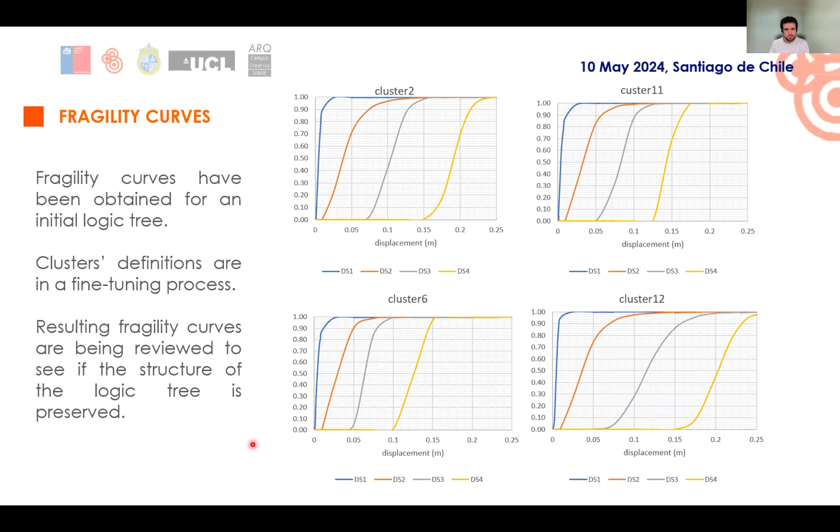These are initial results for a previous logic tree, not for the one that I showed just before. But we can see that between different clusters, we see differences between damage states. We see how the median values of the curves change significantly. Particularly for damage state 4, we see that this one is different than this one, for example. So we're checking that the structure obtained for the capacity curves is preserved in the case of fragility functions. So we're at the stage of fine-tuning this logic tree to get the final fragility functions, and then we can run the seismic risk assessment.

So those are basically the final steps of our research, and we're going to publish this very soon, to fine-tune and finish the definition of the clusters, to make the final definition of the fragility functions. We also want to combine this with empirical data observed after the 2010 earthquake to obtain hybrid fragility functions. And then we want to run a seismic risk assessment of the Yungay neighborhood, to analyze how many buildings are expected to fail, the number of injuries or the economic losses.

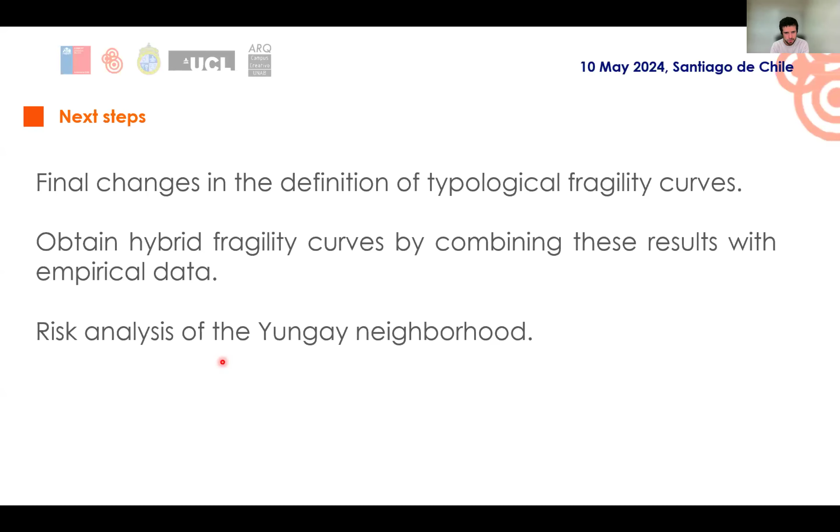I think that today we had the opportunity to see how this FaMIVE methodology can be integrated in different methodologies in different locations. We saw in the latest presentation how this was integrated into the risk assessment to identify losses as well. We saw the same in Valencia with the use of Selena and in Italy with the use of Irma. So I think this is a very good opportunity to bring all this experience here.